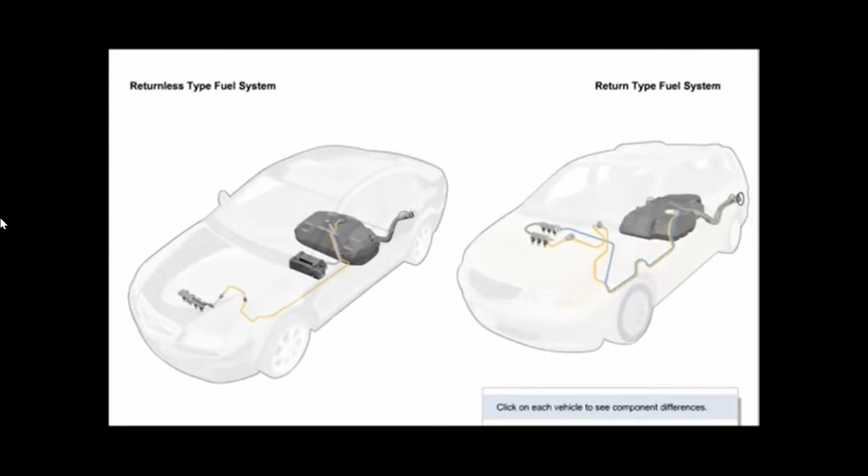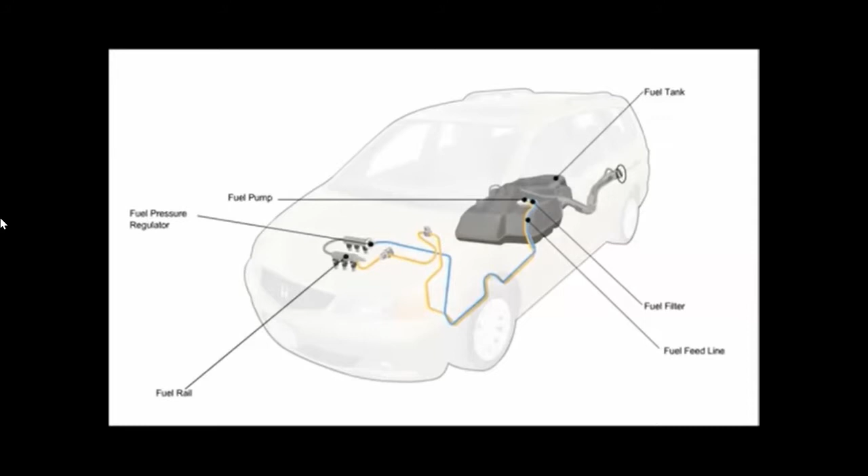There are two types of fuel systems used on both Honda and Acura vehicles: return type and returnless type. Both systems contain similar components but deliver fuel in slightly different ways. The return type fuel supply system has a fuel tank, fuel pump, fuel lines, fuel filter, fuel rail with injectors, pressure regulator, and return line. On a return type fuel system, the pressure regulator is located on the fuel rail.

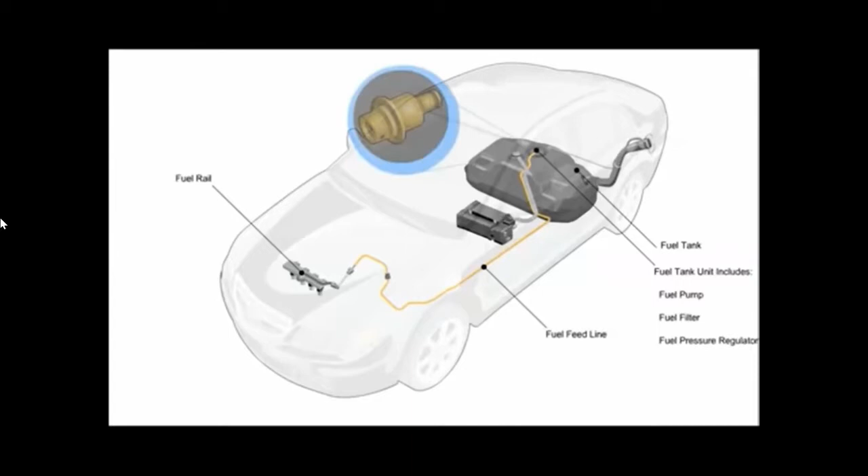The returnless fuel supply system has the same components as a return type, including a fuel tank, fuel pump, fuel filter, pressure regulator, fuel lines, and fuel rail with injectors. It does not, however, have a fuel return line. On a returnless system, the pressure regulator is located inside the fuel tank.

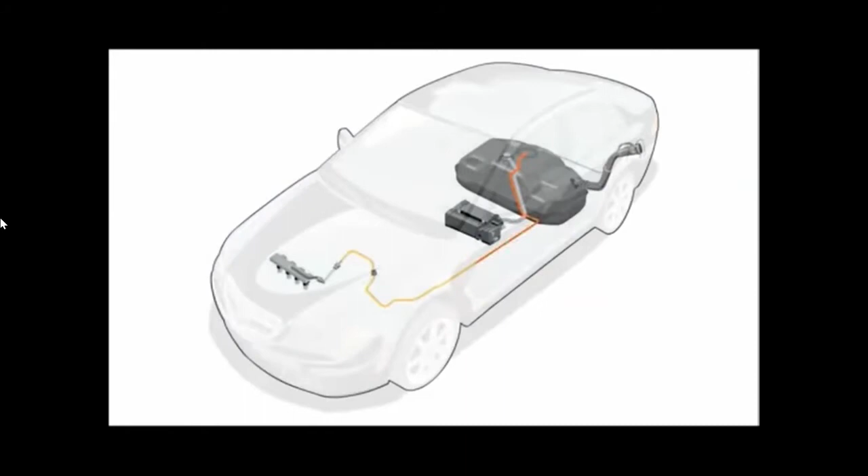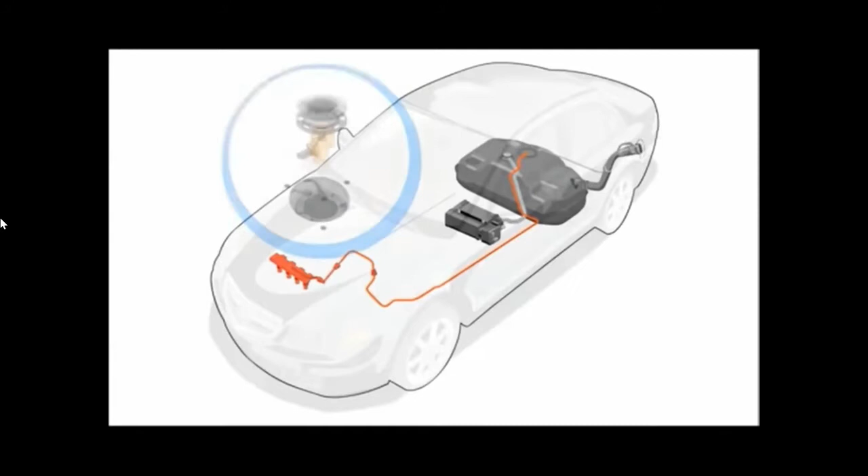At one time, gravity moved the fuel from a vehicle's tank to the carburetor. Today's programmed fuel injection system needs to have a pressurized and constant supply of fuel delivered to the injectors at all times. This supply of constant pressurized fuel is generated by the fuel pump located in the fuel tank. The fuel pump assembly consists of a strainer, pump motor, pump impeller, relief valve, and one-way check valve.

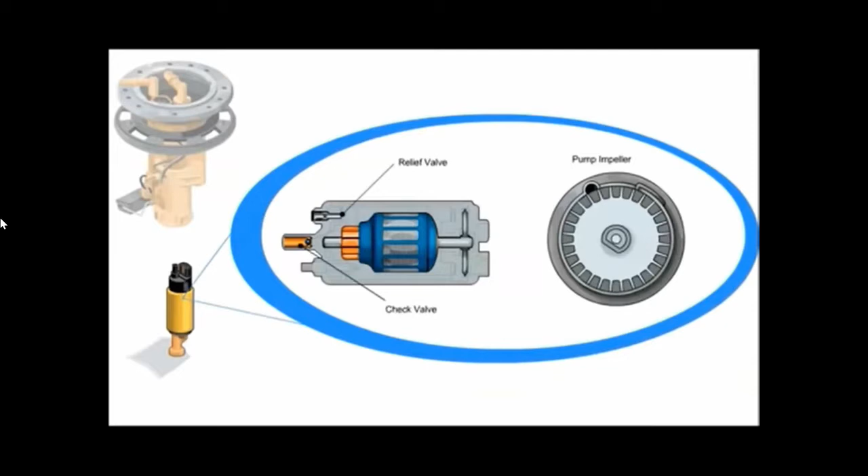The pump is submerged in the fuel and driven electrically to turn an impeller, which draws fuel through the strainer and develops pressure. The fuel exits through a one-way check valve.

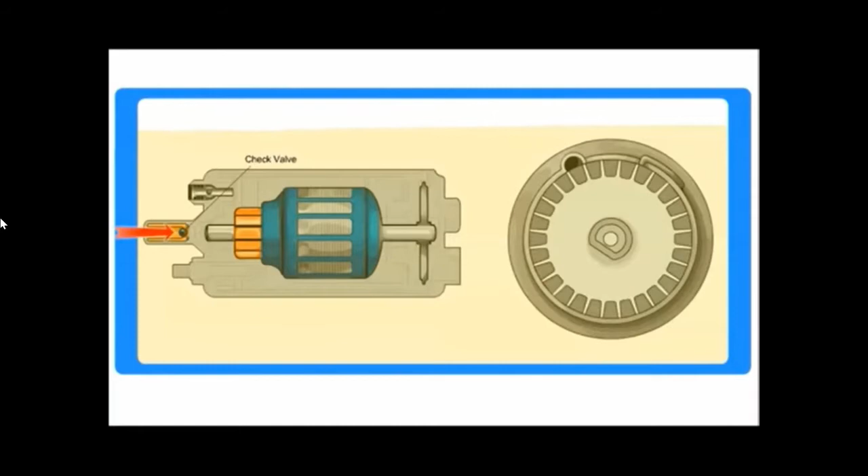The purpose of the check valve is to prevent pressure in the fuel rail from flowing back into the tank when the fuel pump is off. That way, the fuel system will have sufficient pressure when the vehicle is started. The pressure relief valve will open and discharge fuel back into the tank should pressure become excessive.

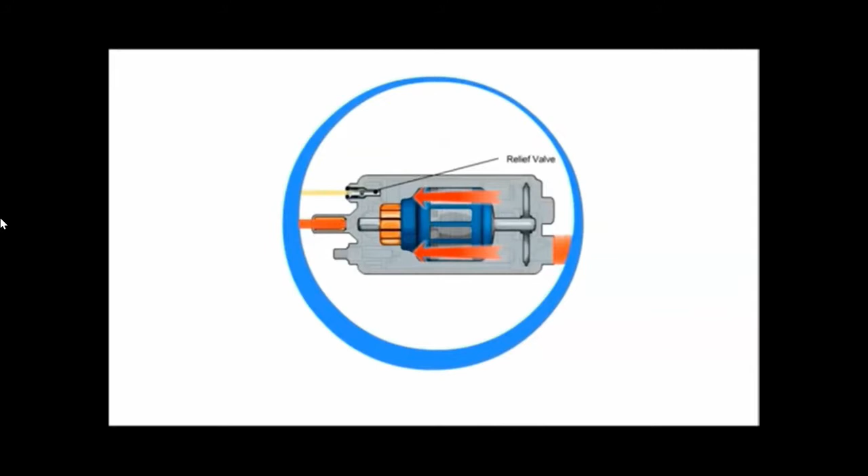The regulator's function is to keep the fuel at the specified pressure. There are slight differences between the return type regulator and the returnless type regulator.

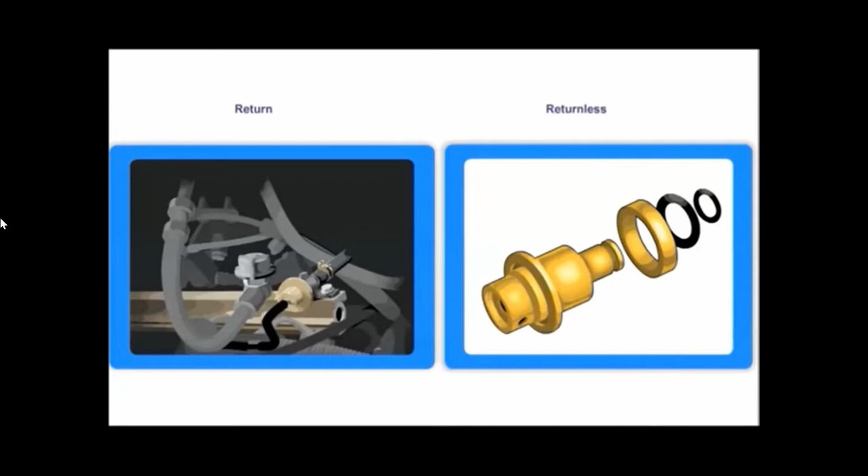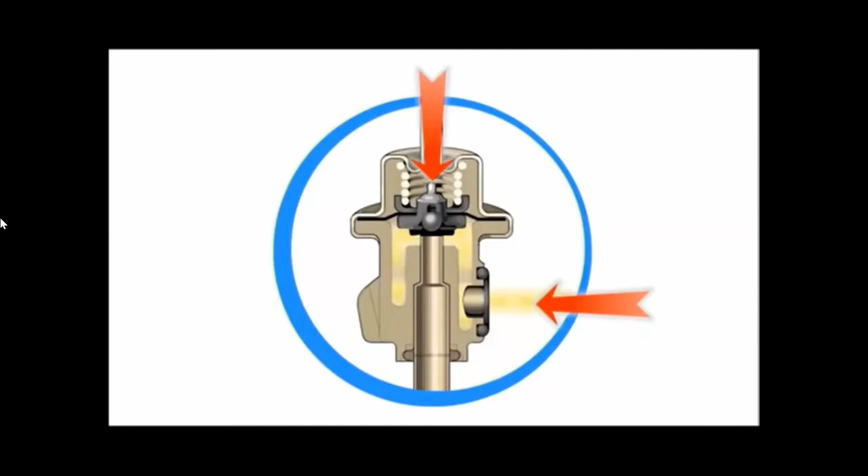The regulator consists of a housing, valve, diaphragm, and spring. The spring holds the valve closed and allows fuel pressure to build up against the diaphragm. When the fuel pressure overcomes the spring pressure, the valve opens and allows excess fuel to bleed off and return to the fuel tank. On a return type system, the regulator is located near the end of the fuel rail.

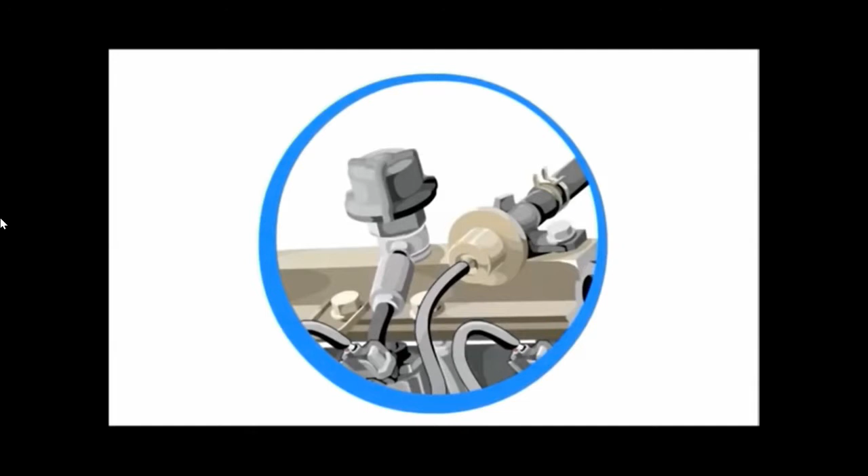When the regulator is connected to the intake manifold, vacuum is routed to the pressure regulator to help overcome spring force. This is done to maintain a constant pressure difference between fuel pressure and manifold air pressure.

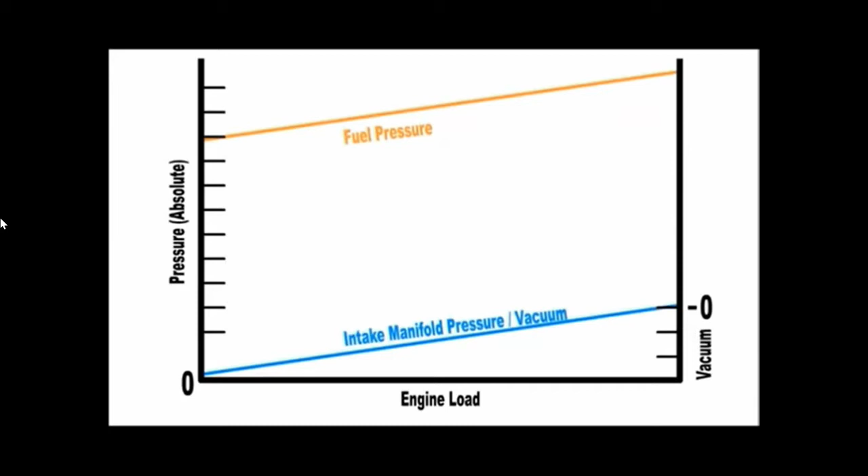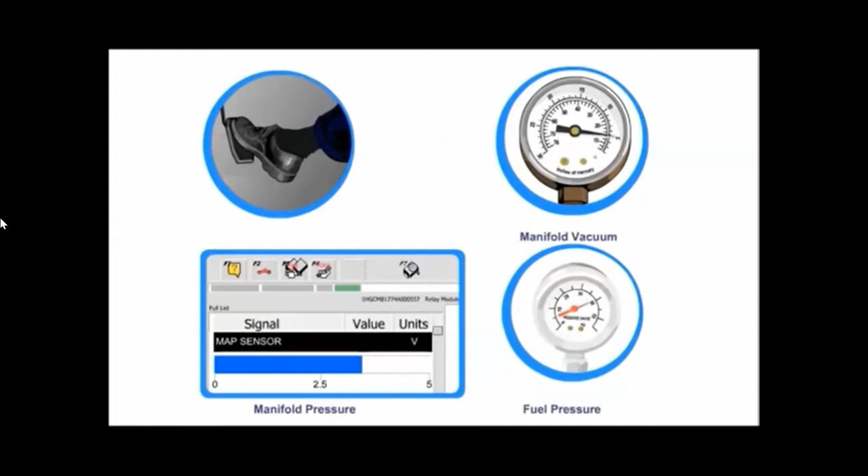When the throttle is closed, manifold vacuum is high and manifold pressure is low. This results in lower fuel pressure. As the throttle opens, manifold vacuum decreases while manifold pressure increases. This results in higher fuel pressure.

Regulators that are connected to the intake air duct are not controlled by engine vacuum. The hose is there to provide unrestricted movement of the regulator diaphragm. These types of regulators operate like returnless regulators, where the ECM-PCM compensates for changes in intake manifold pressure.

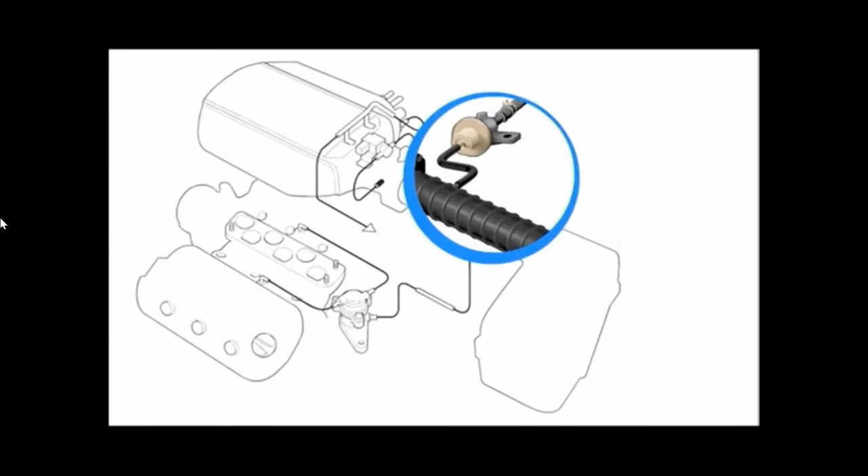On a returnless type system, the regulator is located in the fuel tank and is part of the fuel tank unit. There is no return line between the fuel rail and the tank, which keeps the fuel cooler and reduces evaporative emissions.

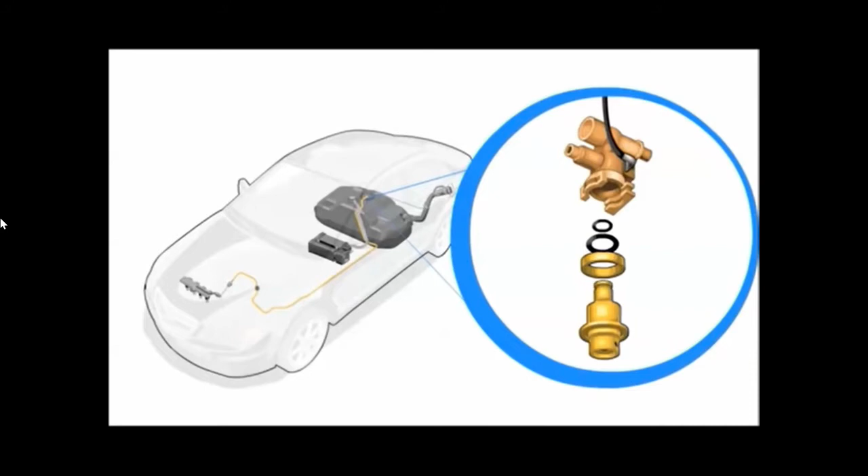Some Honda and Acura vehicles have a fuel pulsation damper located on the fuel rail. The fuel pressure damper is used to absorb pressure pulses and to reduce noise caused by the injectors opening and closing rapidly. The damper has a diaphragm and calibrated spring.

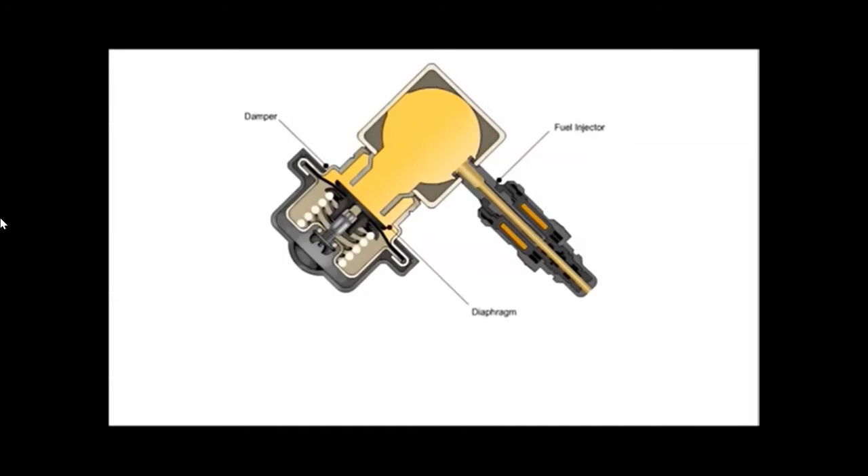The injector's opening and closing creates a pressure shock wave, which is absorbed by the diaphragm as it compresses the spring.

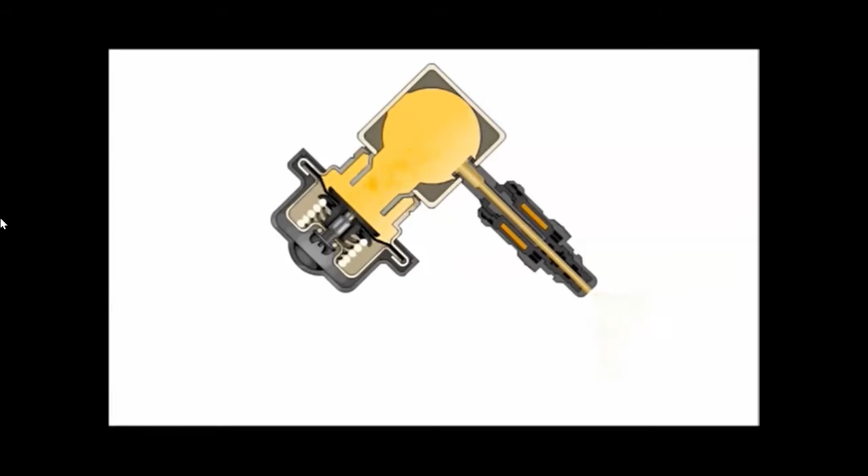The injector is an electrically operated on-off valve that sprays atomized fuel into the intake port of the cylinder. It is normally closed. The ECM-PCM fully opens the injector for a precise time, measured in milliseconds, in order to deliver the correct amount of fuel to mix with the incoming air. The longer the injector is held open, the more fuel is delivered to the combustion chamber.

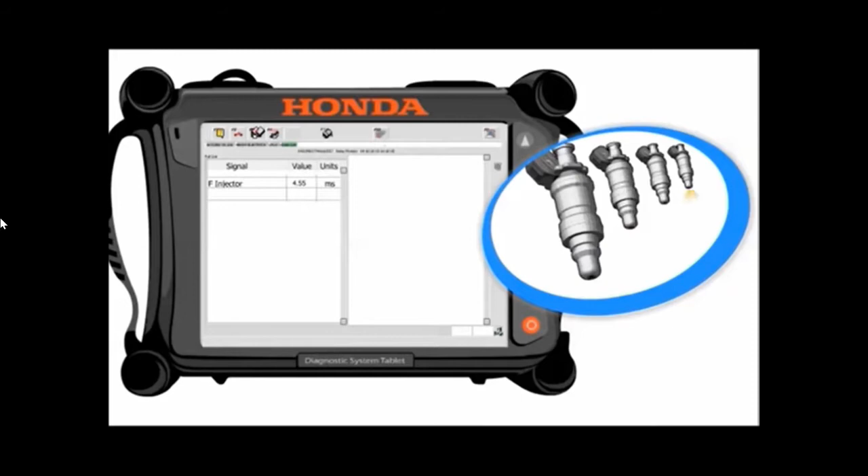The fuel injector body is sealed between the intake manifold and the fuel rail. The internal components include an inlet screen, electrical connector, electromagnetic solenoid coil, plunger, and a discharge nozzle designed to produce a cone-shaped pattern.

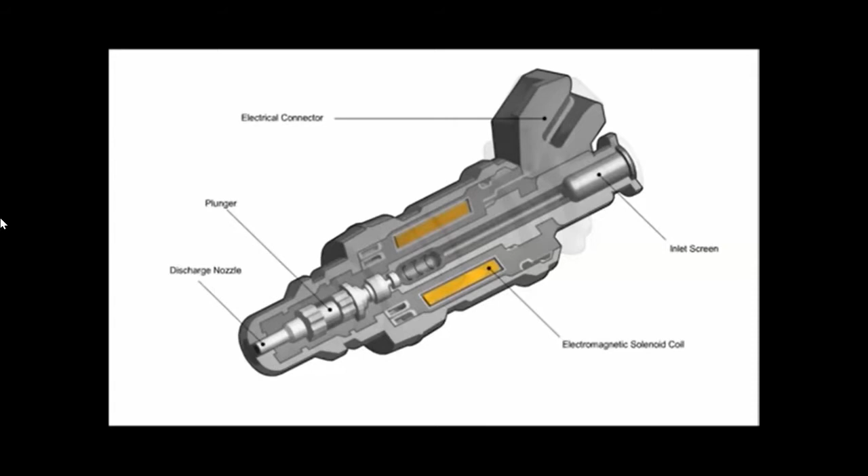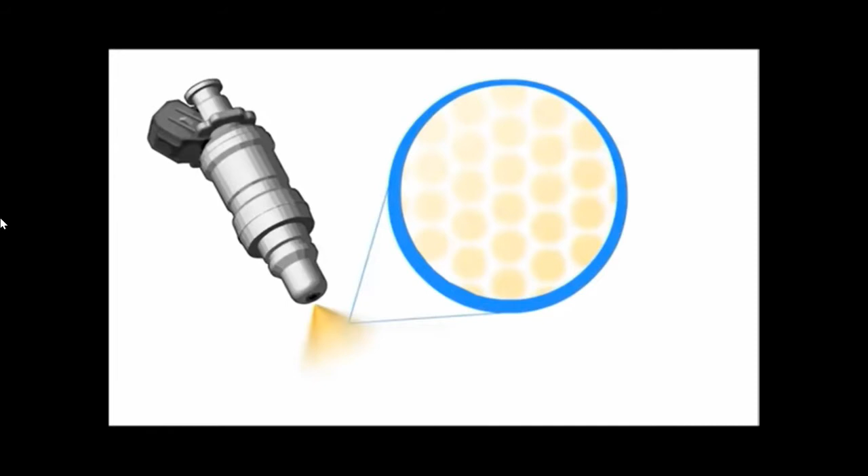The injector discharge nozzle is designed to optimize fuel atomization by creating extremely fine droplets. Improved atomization enhances engine performance and reduces emissions. Fuel pressure must be within specifications for the ECM-PCM to be able to control the air-fuel ratio accurately.

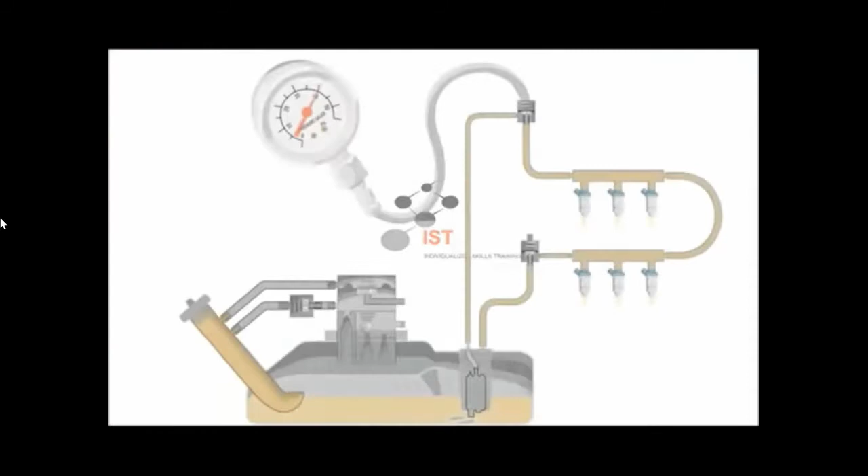Low fuel pressure can be caused by low or no pump output, restricted strainer, restricted filter, restricted supply line, or a stuck open or weak spring in the regulator.

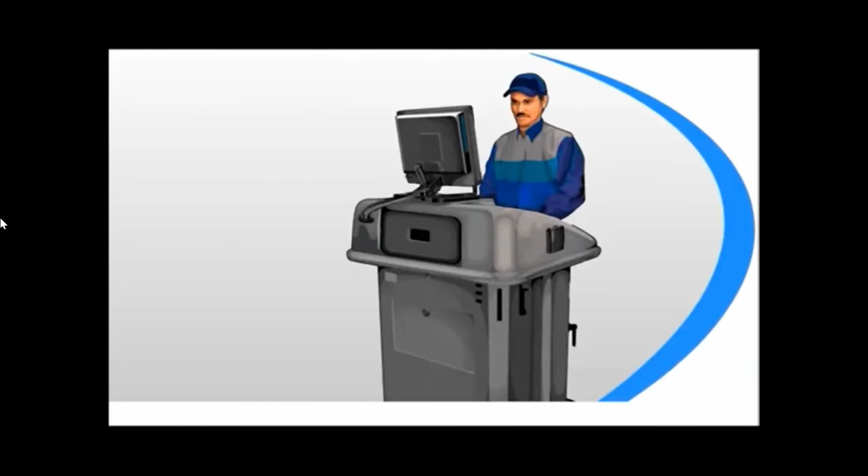To isolate which component is responsible for the low pressure, first check for any service bulletins or service news articles that apply, and follow the procedures they provide. If there are no bulletins or service news articles, start with the easiest component to test.

First, inspect fuel lines between the fuel tank and the fuel rail for any kinks, leaks, or deformation. Then, on a return system, the pressure regulator would be the next place to start.

To determine if the pressure regulator is stuck open, relieving too much pressure, pinch close the return line with swivel jaw hose pinching pliers. If pressure rises, the regulator is likely at fault.

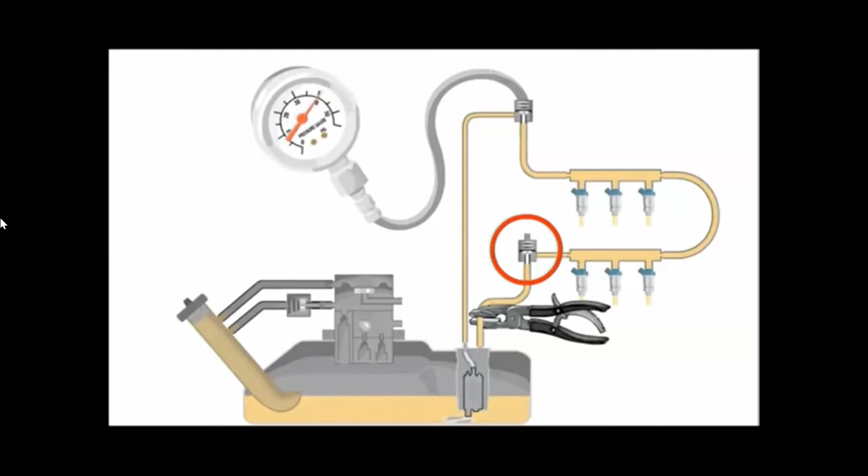If the pressure regulator is okay, the fuel filter and strainer, suction filter, should be replaced. Before you replace them, however, you need to make sure that whatever condition caused them to become clogged is no longer present. Otherwise, they may become clogged again soon.

If working on a returnless system, replace the pressure regulator and fuel filter.

For a customer concern of long crank time or hard starting, observe the pressure reading right after shutting off the engine. There should not be a rapid fuel pressure drop immediately after shutoff.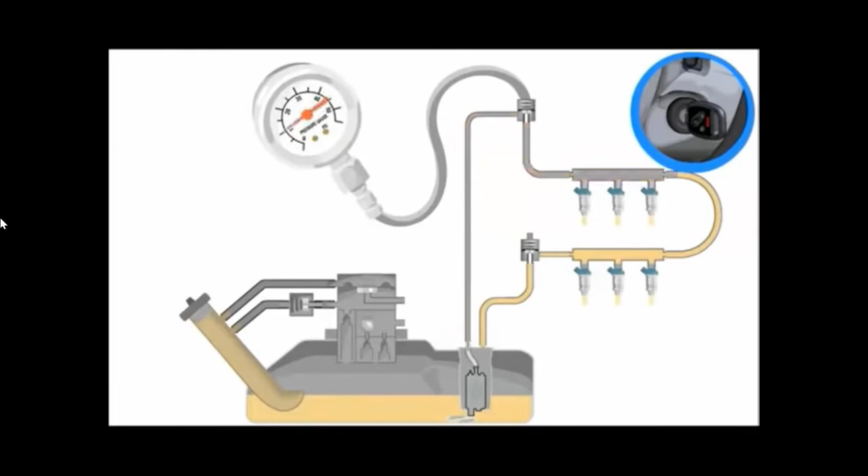If the pressure drops fast, the internal possibilities are: check valve in the fuel pump not seating, leaking injectors, or pressure regulator not closing. An external possibility is a leak such as fuel hoses and lines before the regulator.

First, inspect the lines for leaks. If none, pinch off the return line and recheck key-off fuel pressure to see if it now holds. If it does, the regulator is the issue.

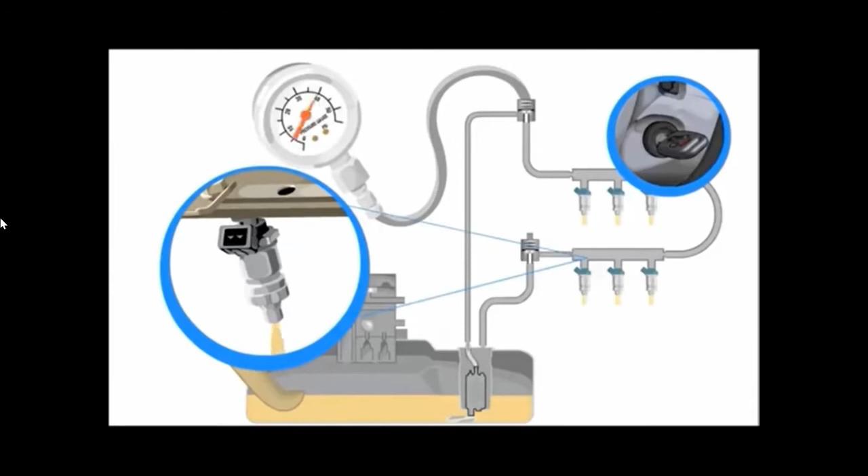If not, then remove the fuel rail and injectors together and check for leaking by turning the ignition switch to on. You can also check for leaky injectors by pinching off both the fuel inlet and return lines and then monitoring fuel pressure.

If the injectors are okay, the fuel pump check valve is the issue, and the pump will need to be replaced. Note that the check valve is an integral part of the fuel pump and cannot be separately replaced.

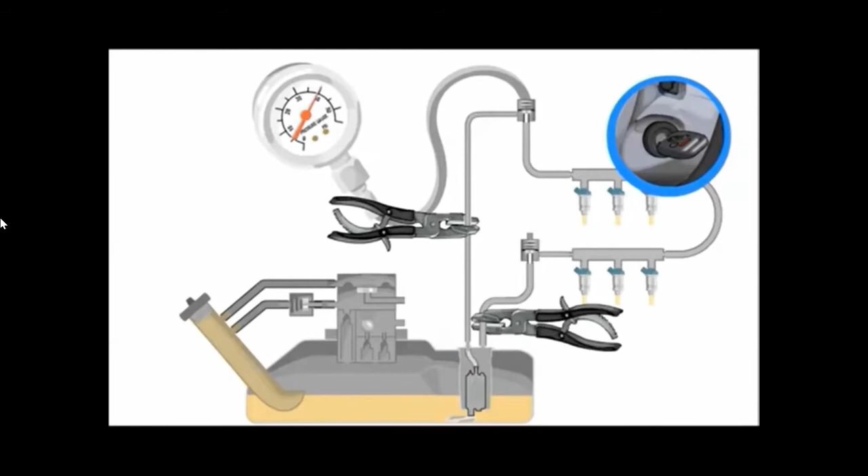High fuel pressure can be a result of a faulty regulator or a restriction in the return line after the regulator. Check the vacuum hose to the regulator first.

If it is disconnected or blocked from manifold vacuum, the pressure will be high. If it's not a vacuum hose issue or the return line blocked, then the regulator needs to be replaced. If you see fuel in the vacuum line, the pressure regulator diaphragm is leaking and needs to be replaced.

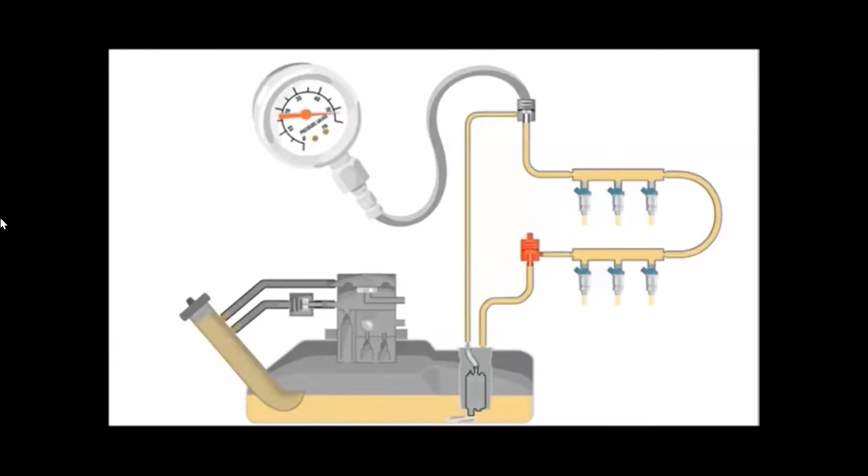In the Fuel System Introduction module, you learned how the fuel injectors and fuel pump work hydraulically. In this module, you'll learn how these components work electrically.

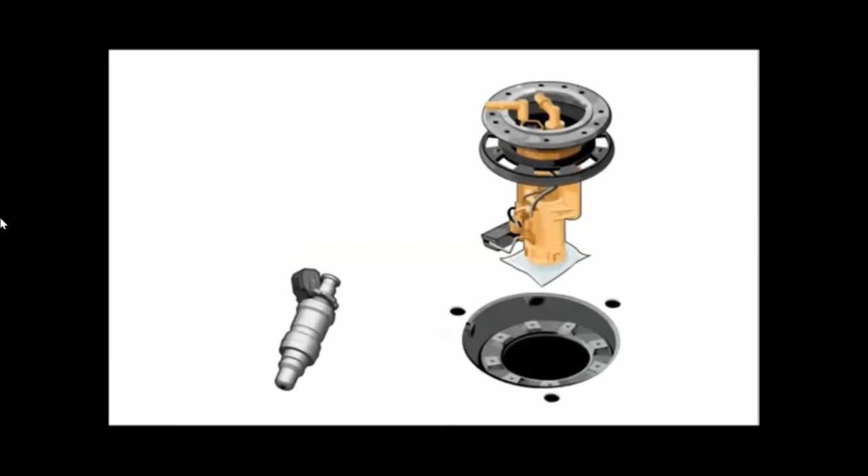Like other electrical components on the vehicle, the fuel pump and injectors require power to operate. But they don't just operate all the time. Instead, they are controlled by the ECM-PCM through relays to operate at the correct time.

Remember that a relay is an electromagnetic switch with two sides, power and control. The ECM-PCM operates the control side of the relay to provide a power path to the fuel injectors and fuel pump. Fuel injectors are basically on-off solenoid valves that spray fuel into the intake port of the cylinder.

The fuel injectors require power and ground to operate. Power to the injectors comes through the PGM-FI main relay, which is energized whenever the ignition switch is turned on. The ECM-PCM provides the injectors with a ground path. This is also how it turns the injectors on and off.

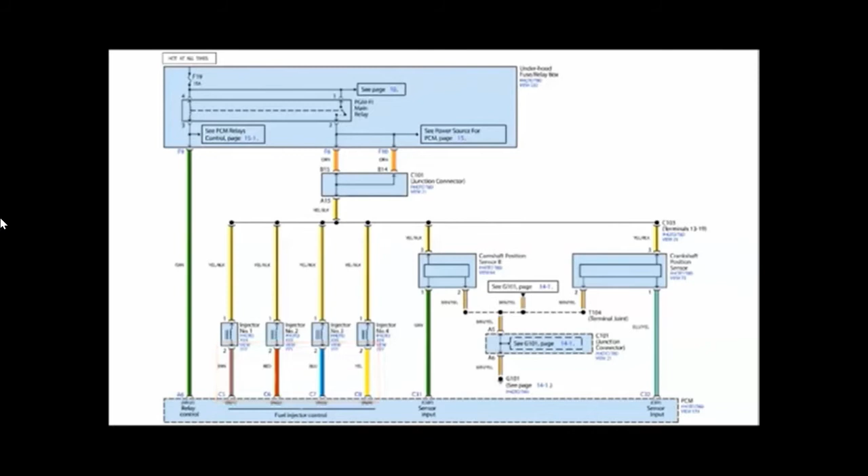When there is no ground, the injector is closed and is not spraying fuel. When there is a ground, the injector is open and is spraying fuel. The longer the ground is on, the longer the injector is open, and the more fuel that enters the combustion chamber. The ECM-PCM uses various inputs to calculate exactly when grounding, injector opening time, should begin, and how long it should last.

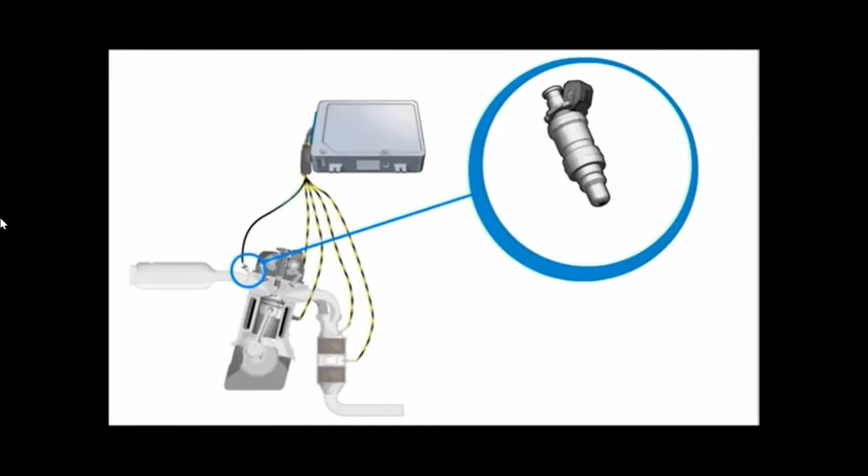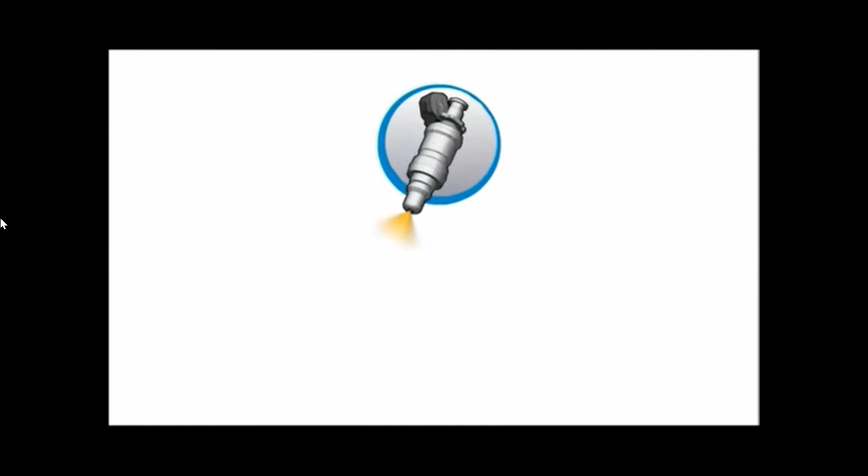The opening time is called injector duration and is measured in milliseconds or thousandths of a second. You can observe injector duration with a DMM or on a scan tool.

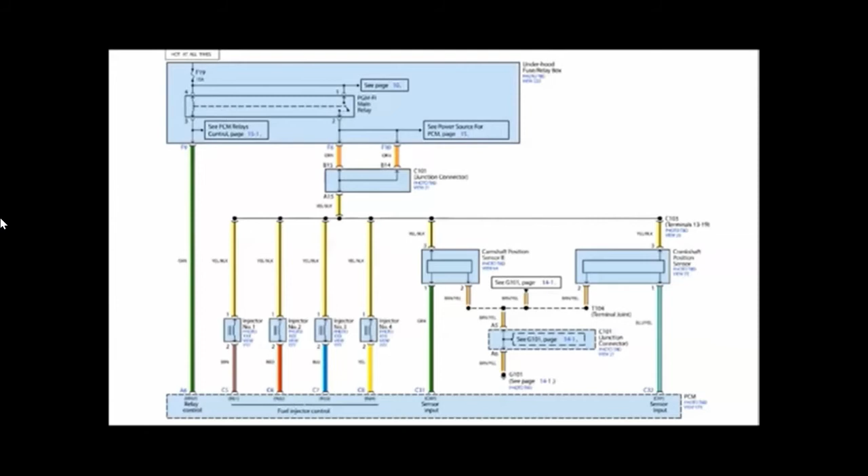Before you can view injector duration with a DMM, you first need to figure out which wires to back probe. Look in the ETM and see which two wires go to each injector. One wire provides power, and the other ground or control.

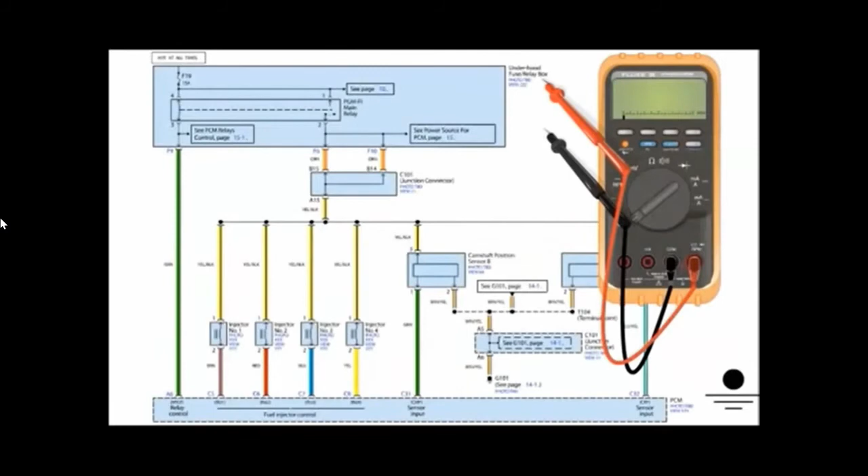Carefully back probe the wire with the red lead. Then connect the black lead to chassis ground. Set up the multimeter to read injector duration.

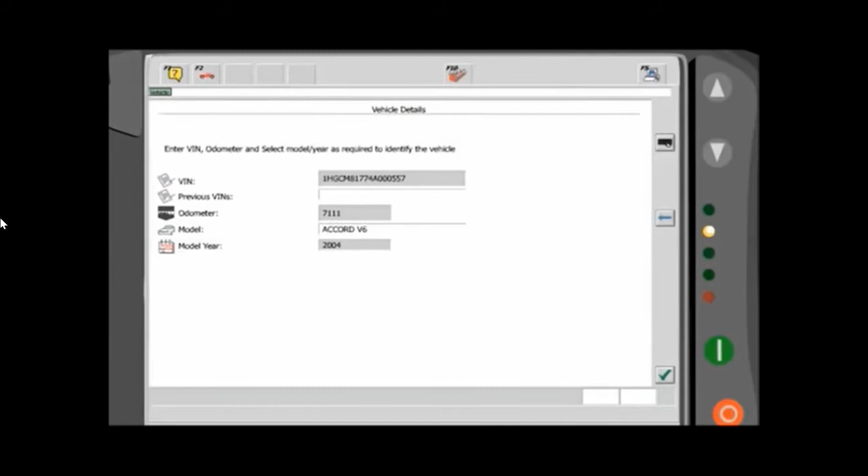To view injector duration on a scan tool, first plug in the tool and enter the vehicle information. Open the PGM-FI menu and the data list.

Duration will change based on engine loads and operating conditions. Injector duration is shown here with the engine at idle, transmission in park, and all electrical loads off. When air conditioning and other loads are placed on the engine, the ECM-PCM will increase injector duration to compensate. If it did not do this, engine idle speed would drop under these added loads.

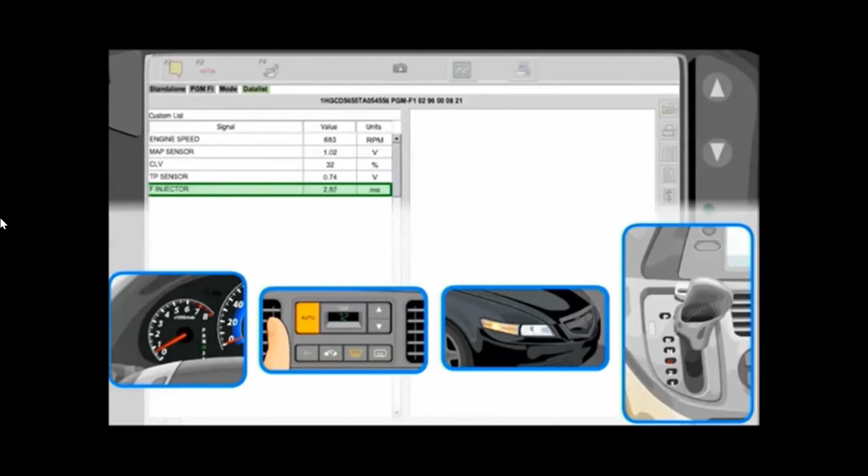When a vehicle decelerates with a closed throttle, the ECM-PCM turns the fuel injectors off to save fuel. It turns the injectors back on right before the engine reaches idle speed. This function is called fuel cut and is normal.

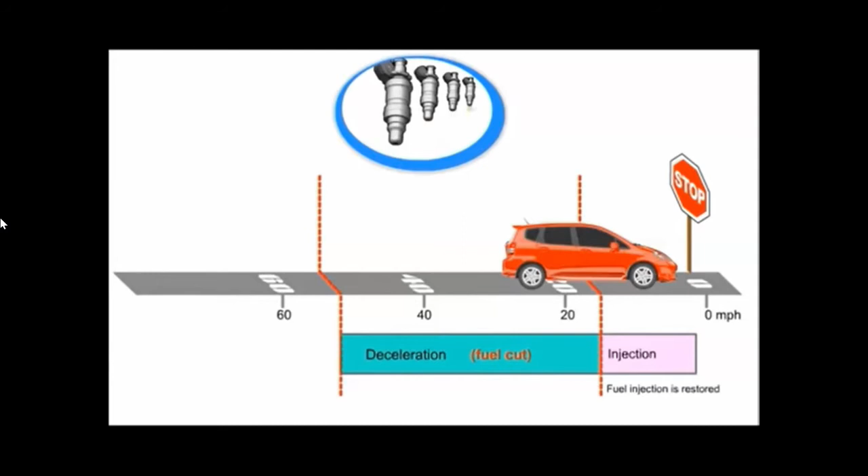Fuel cutoff also occurs when engine speed gets too high, regardless of throttle position. It does this to protect the engine from over-revving.

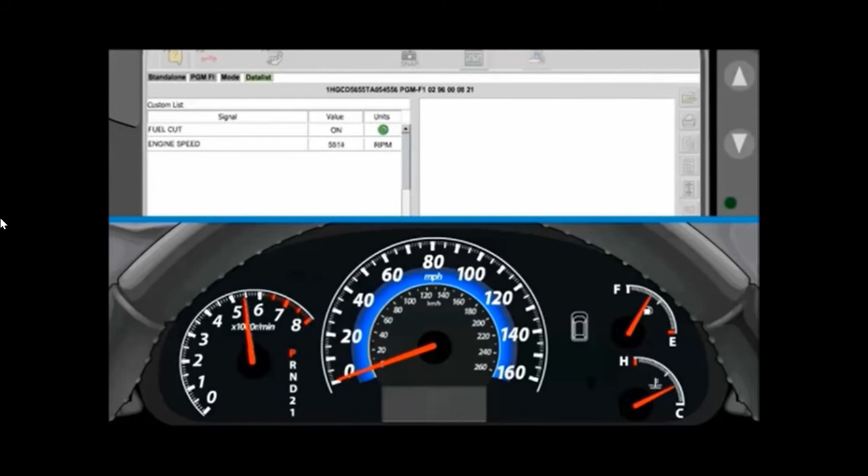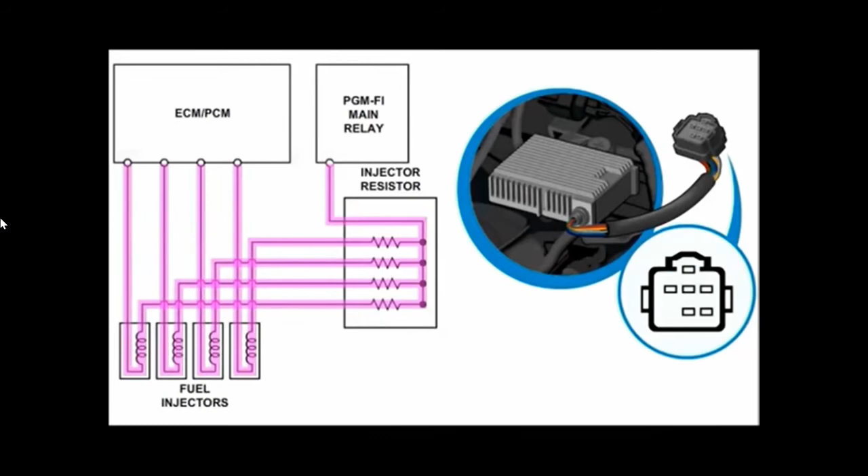Some older models may have injector resistor assemblies. Power flows through the resistors before going to the injectors. The injectors on these vehicles are designed to operate on reduced voltage.

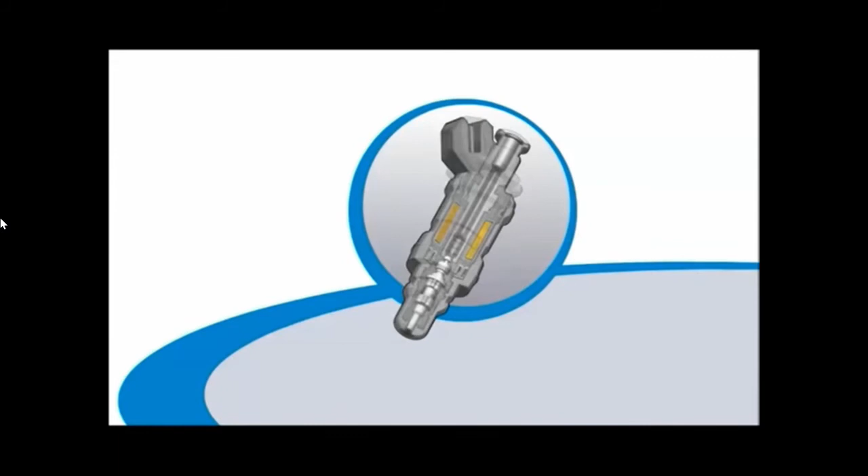Newer vehicles do not contain separate resistor assemblies. Instead, the injectors have higher internal resistance.

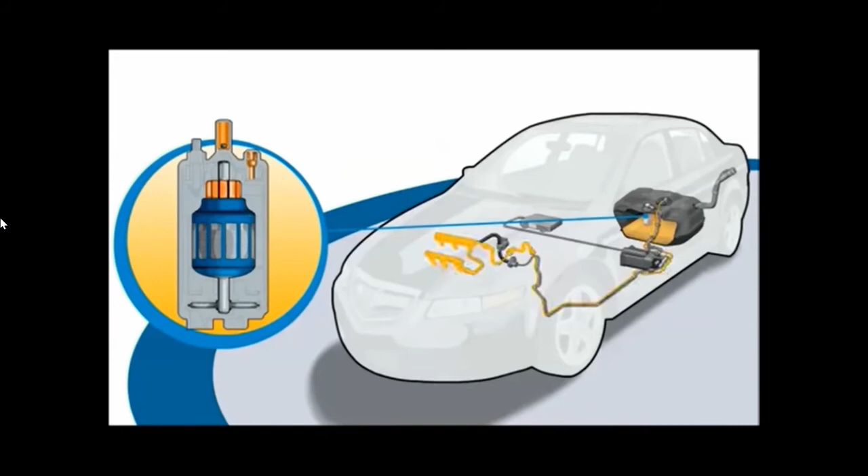The fuel pump's job is to pressurize the fuel system for engine starting and then continue providing fuel for the injectors while the engine is running. The PGM-FI main relay also supplies power to the fuel pump relay.

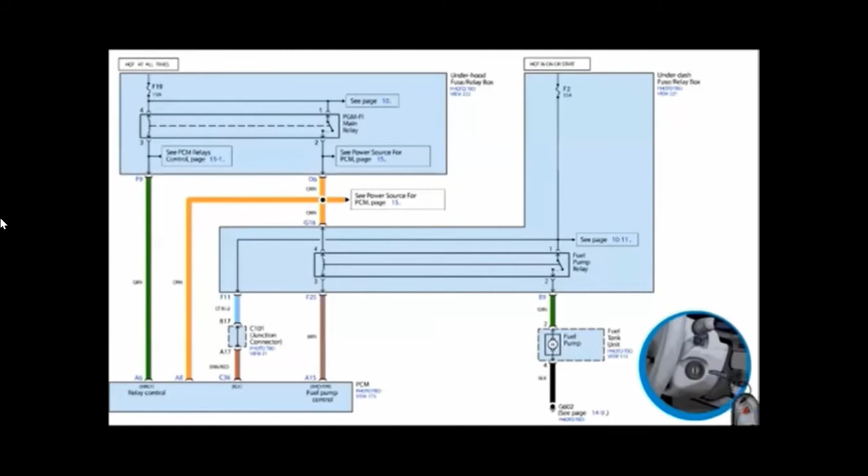When you turn on the ignition switch, the ECM-PCM activates the pump relay for 2 seconds to turn the pump on and pressurize the system. If it does not see the engine running, it will turn off the relay and stop the fuel pump. If the ECM-PCM does see the engine running, it will keep the fuel pump running continuously.

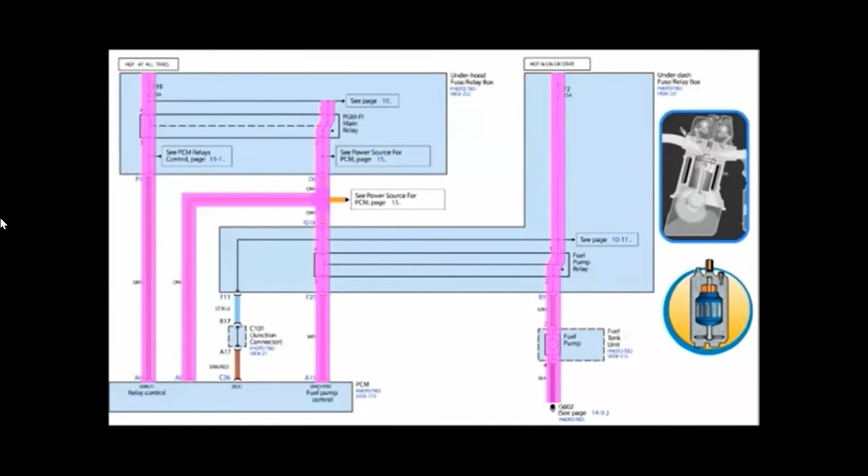Some vehicles have multi-speed fuel pumps, which offer more precise control of the fuel supply. In the older type, the ECM-PCM varies pump speed by applying either low or high voltage to the pump, depending on engine fuel requirements. When less fuel is needed, the ECM-PCM deactivates the fuel pump relay, and current goes through the fuel pump resistor to lower the output of the pump.

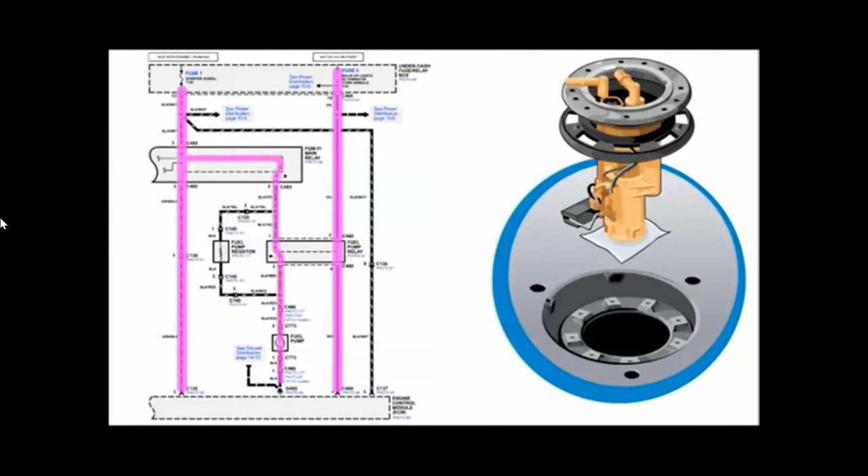When fuel demands increase, the ECM-PCM activates the fuel pump relay so that current can bypass the resistor and go directly to the pump to increase output.

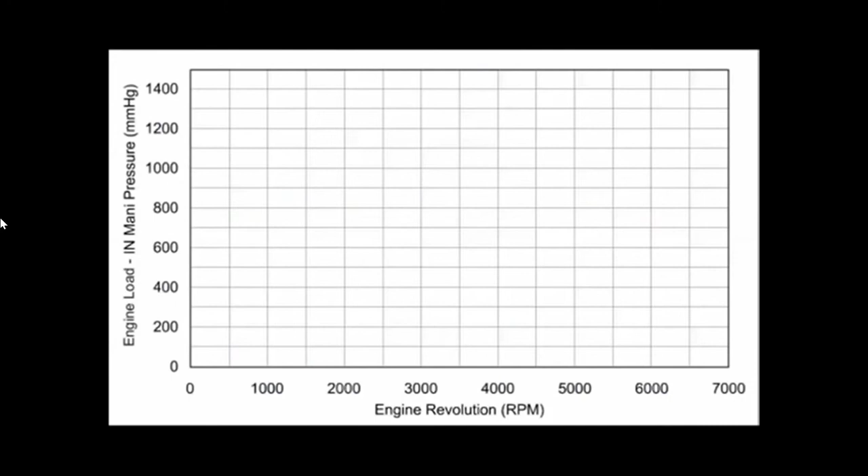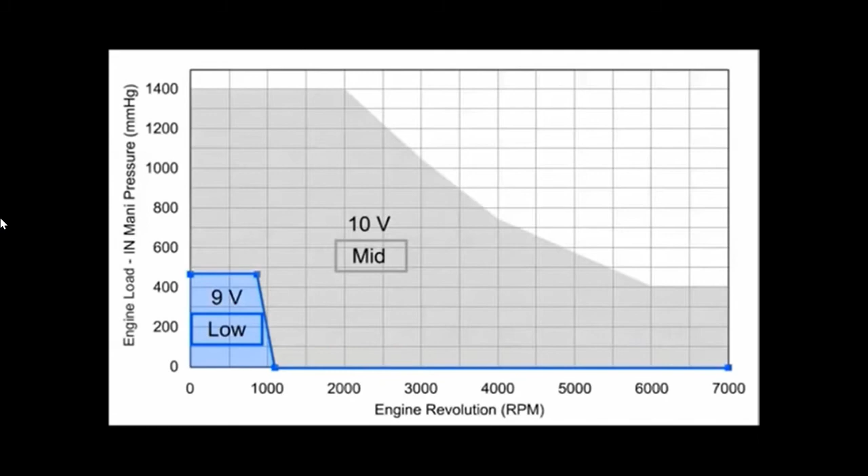Newer vehicles have a separate fuel pump control unit that changes fuel pump speed with driving conditions. The fuel pump will operate in 3 modes: low, mid, and high. When engine speed and load are low, the fuel pump receives 9 volts. As engine speed and load increase, the voltage will increase to 10 volts, and then battery voltage under heavy load and high engine speed.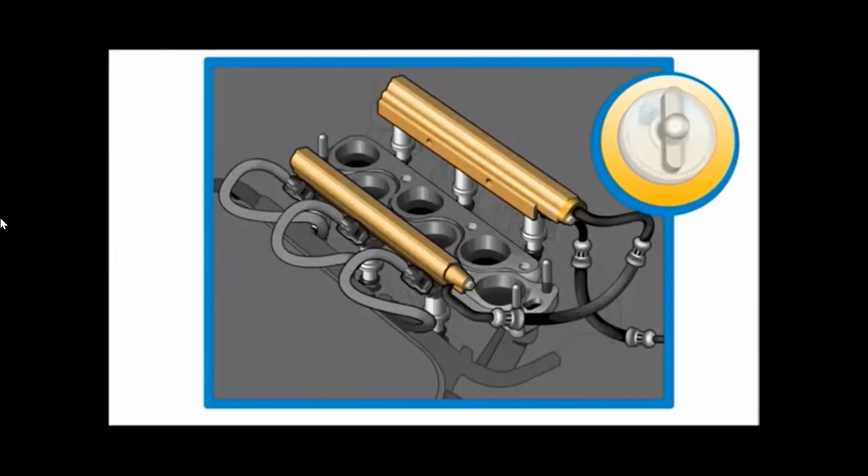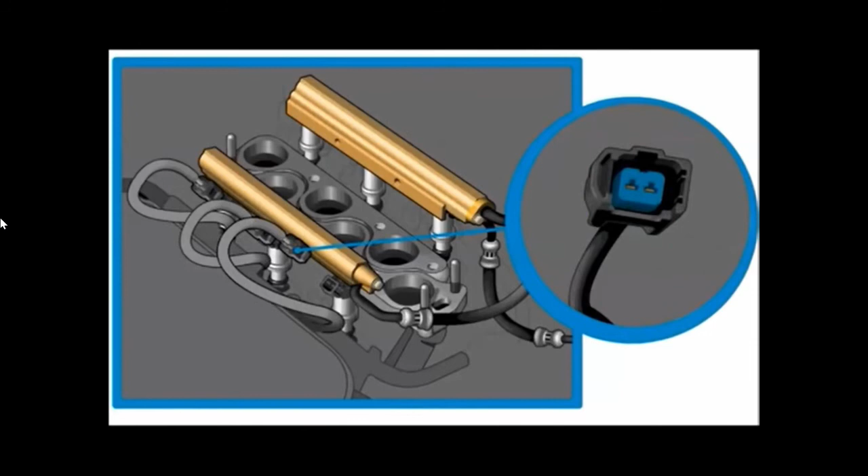There are several ways to test fuel injectors, such as when diagnosing a no-start or misfire condition. A NOID light offers a quick way of seeing the electrical side of a fuel injector in action. To do this, disconnect one of the injector connectors and plug in the NOID light. When the engine is cranking or running, the light will flash each time the ECM-PCM energizes the injector. The time the light is on is the time the injector would have been spraying fuel.

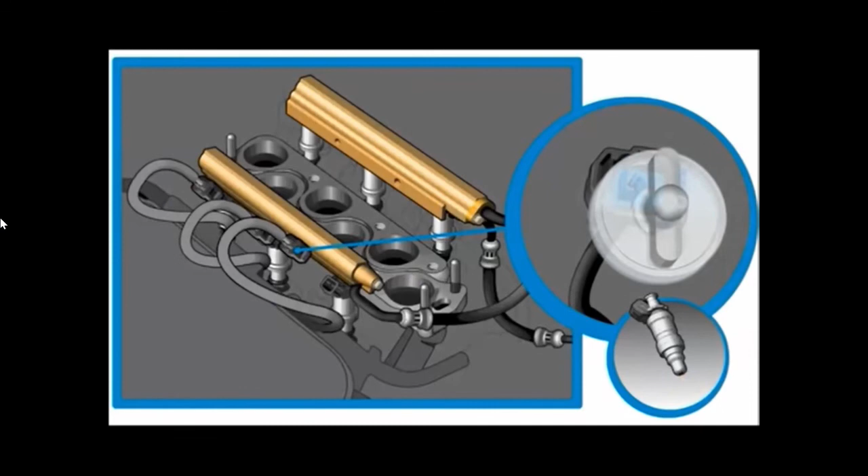If the NOID light does not illuminate and flash, there could be an open in either the power or ground sides of the injector circuit. A light that flashes dimly indicates unwanted resistance in the power or ground circuit. If the light is constantly on without flashing, there is a short to ground on the control side of the circuit.

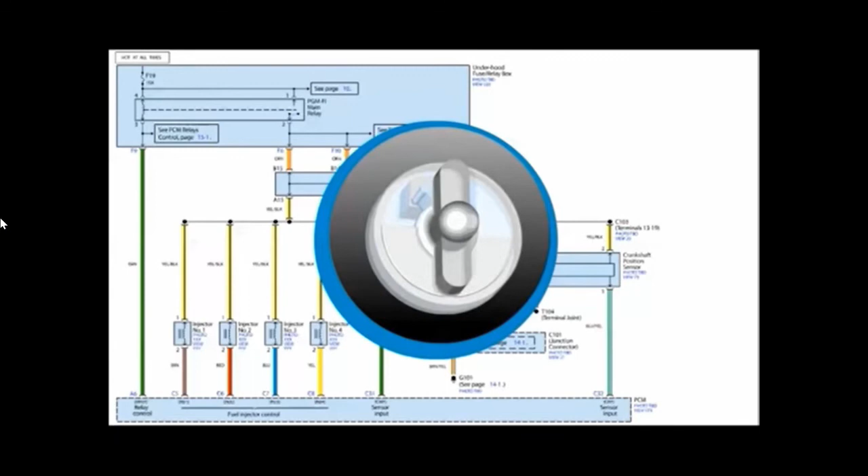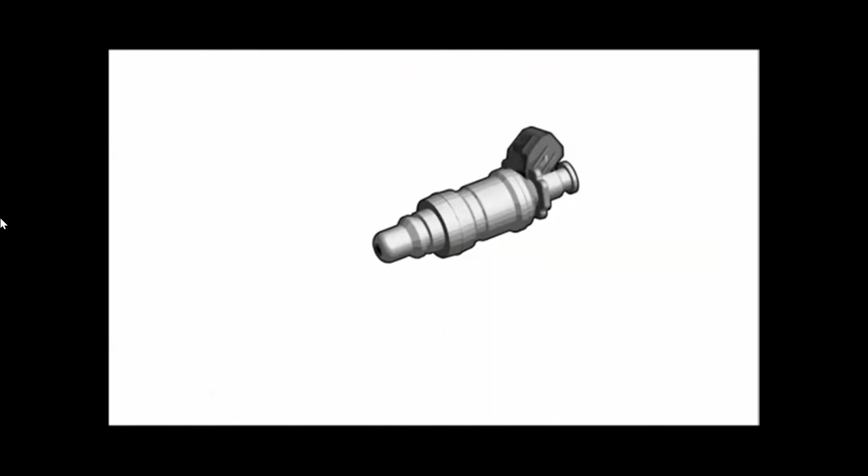A properly operating injector should make a clicking sound when the engine is running. You can listen to it with an automotive stethoscope. This can be helpful in verifying the injectors are opening and closing. If you hear the injectors opening and closing, there can still be a fuel flow blockage or a problem with the spray pattern. A cylinder balance test can help you identify which cylinder may not be getting the proper fuel.

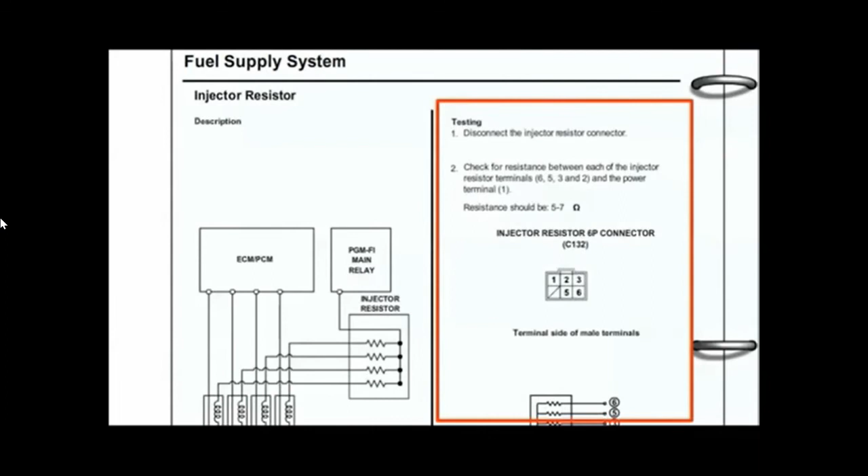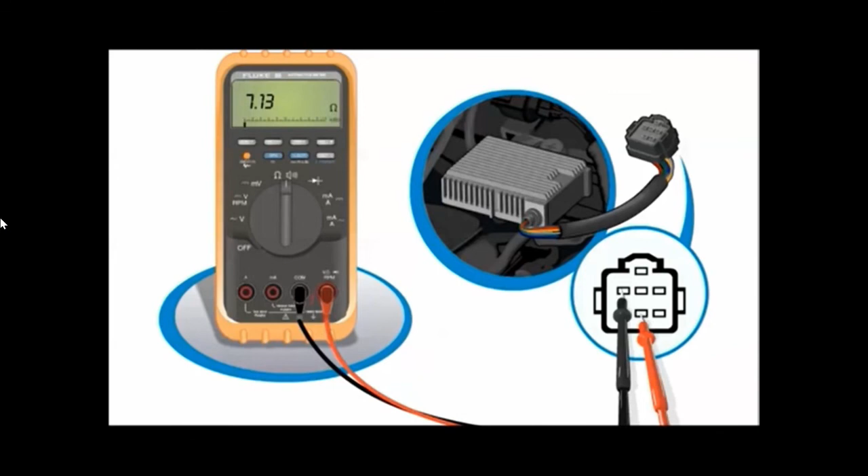To test the resistors, follow the steps listed in service information. In this example, you first disconnect the injector resistor connector. Then check the resistance between each of the injector resistor terminals and the power terminal. The resistance value should be between 5 and 7 ohms. If any of the resistance readings are outside the specification, replace the resistor assembly.

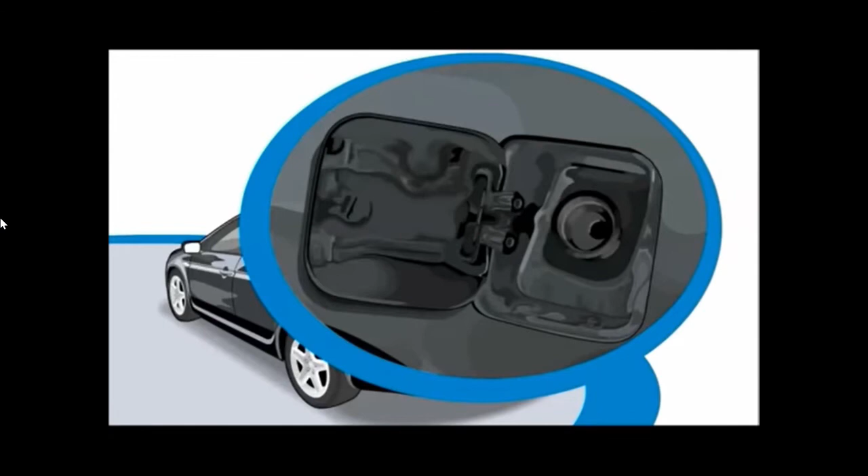When you first turn the ignition switch on without starting the engine, you'll hear the pump run for 2 seconds and then turn off. You may need to unscrew the fuel fill cap and listen to hear it. Some vehicles allow you to turn on the fuel pump manually with the scan tool, which can be helpful in isolating fuel system problems.